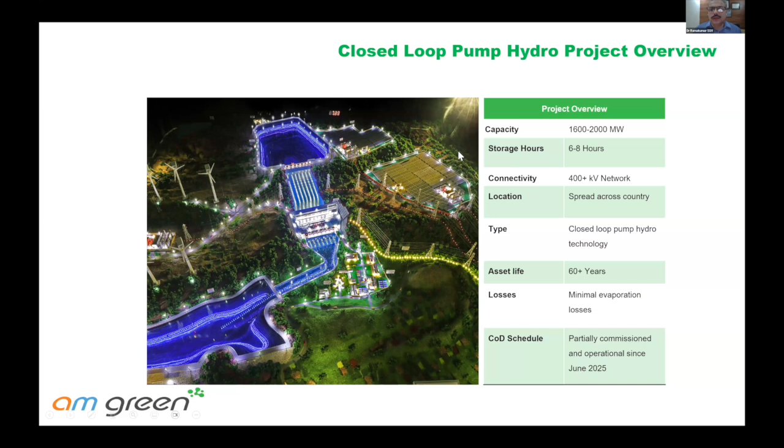So this is that PSP project in the southern part of the country, which has just gone critical. This has two greenfield reservoirs, upper and lower. It's a huge water battery wherein the excess power will be stored by pumping the water from the lower reservoir to the upper reservoir. And in the night time, when the renewable electricity is not there, you release the upper reservoir water back to the lower reservoir. This operation is facilitated by reversible pumps, which act in one direction as a pump and in the other direction as a turbine. They're gigantic turbines supporting that capacity. So that's about my company.

So the theme of today's topic is what Indian players, prospective players, whether government or private players, who seek to set up production units and turn to be SAF producers on a global scale, are looking for. Before I do that in the next 15, 18 odd minutes, let me set the context.

India is going to be ethanol surplus, even after blending 20% of ethanol in gasoline. Our ethanol blending program in gasoline is one of the national success stories, wherein in the last 10 years, from a meager 5 to 7% to 20%, we were able to raise the blending percentage of ethanol, but predominantly the ethanol being produced in the country today is first generation ethanol. So, 2 years back, the Ministry of Petroleum and Natural Gas constituted a committee to recommend which pathways are suitable for India and what kind of blending percentages India should look for come 2027.

This committee was constituted and convened by me as the then Director R&D of Indian Oil, and our recommendation was that the most suitable pathway is alcohol to jet, because alcohol is going to be surplus in India, and we have recommended certain percentages. Since they are not officially mandated, I'm not really giving the numbers to you, but it varies anywhere up to 10% by 2030.

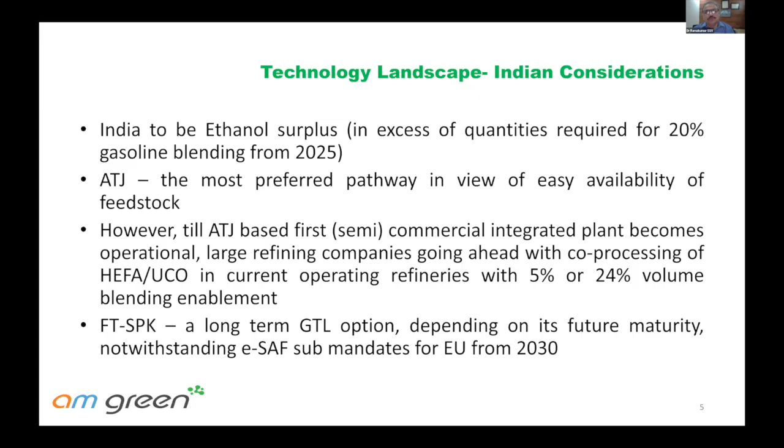Various players, my own company included, are also looking for some of these technologies. I would like to put a disclaimer before I start these slides: whatever global multinational licensors' process licenses of these technologies, I have extensively used the information of these respective licensors, which is openly available in the public domain. So that is the disclaimer.

So the first generic pathway is sugars to ethanol and ethanol to SAF. Whatever sugars you have, for the time being forget the biomass part. But in whatever way you get the sugars, after fermentation you get the ethanol, and ethanol can be a monolithic production at one large plant, or there are a lot of sugar distilleries in the country, so it can be in a decentralized form.

The ethanol can be produced and then subjected to a two-step process of ethanol dehydration, followed by oligomerization of the resultant ethylene. So it is dehydration, oligomerization, followed by hydrogenation and fractionation. That is the generic pathway.

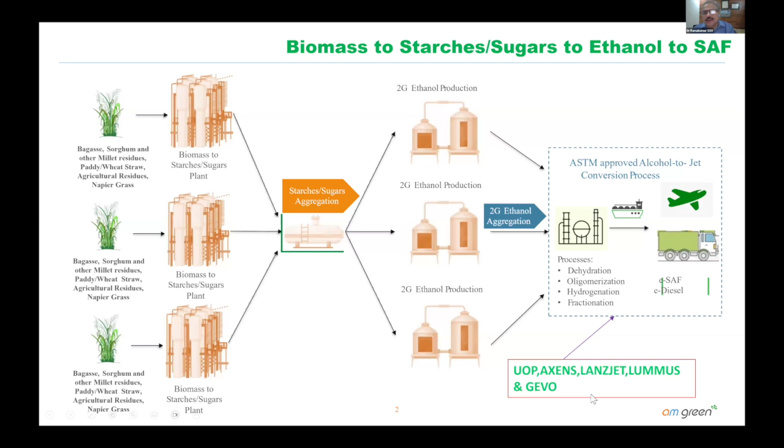And these many players are there: UOP, Axens, LanzaJet, Lummus, and Gevo. I'll discuss a few of them, the salient features of some of these players.

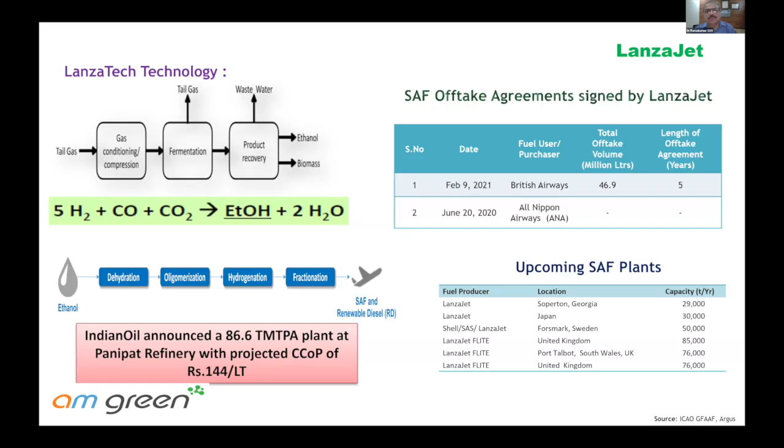LanzaTech is one of the front runners pursuing ATJ. Their technology and pathway is ASTM approved, and they have announced quite a number of projects on ATJ throughout the world, including in India. In India, one of the largest government oil companies, Indian Oil Corporation, has already announced an 86.6 thousand metric ton per annum plant based on this particular technology. And my own company, AM Green, has already developed a detailed feasibility report based on this technology.

So if you see the overall carbon intensity of these pathways, we have done a scenario study, and depending on what kind of power and what kind of hydrogen we are using, and what is the source of alcohol used as feedstock, the carbon intensity can be as low as 16.29 grams CO2 equivalent per megajoule of ATJ-SPK. So a whopping 82% emission reduction potential can be obtained if we use renewable energy and green hydrogen for this.

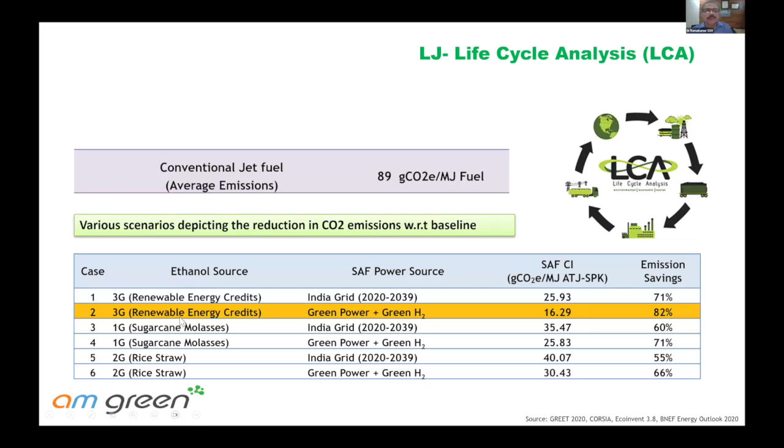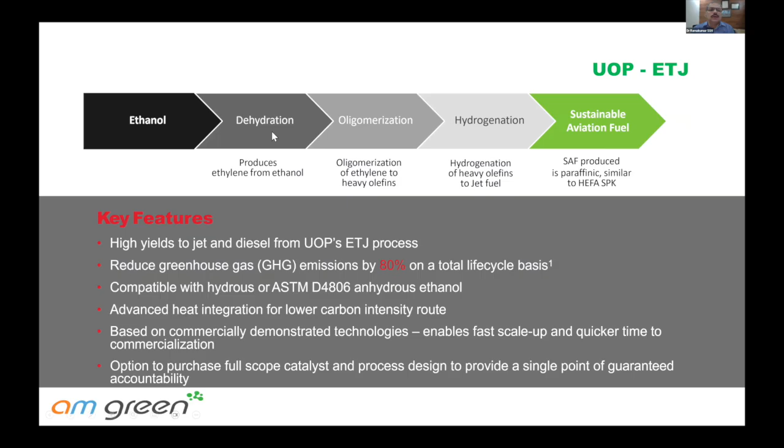So there is another potential technology pathway, UOP. UOP also has an ETJ technology: ethanol dehydration, oligomerization, and the generic route.

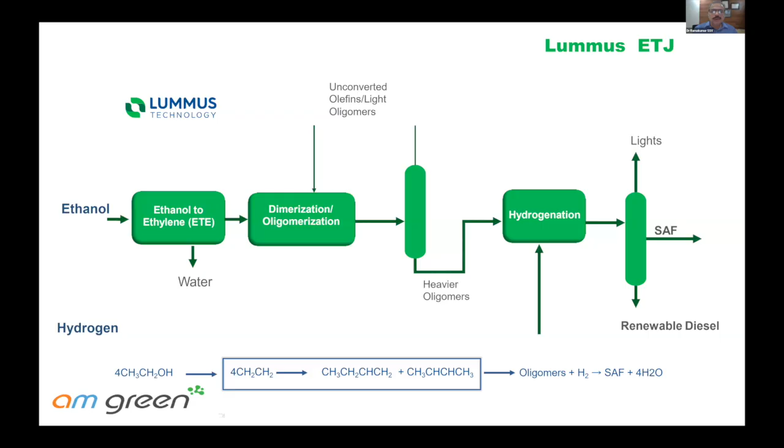Likewise, Lummus is another dominant global licensor who has also announced that they are ready with the ETJ part. Their claim is that they don't have an integrated SAF plant, but they have a very well proven ethanol to ethylene dehydration technology.

They have 10 years of commercial operating experience, and at least a couple of units are operating continuously for the last 10 years.

Likewise, their pathway goes from ethylene. After the production of ethylene, it can go first to dimerization, and from dimerization to oligomerization, followed by the conventional steps of hydrogenation. Lummus also claims they have 37 years of experience in oligomerization, converting lower olefins into higher olefins and SAF-like C8 kind of products.

So their claim is that the individual sub-processes of ATJ are more than amply commercially proven, and just process integration is a regular job for Lummus. That's their claim.

And they have not spelled out what their carbon intensity is going to be, but I think they can also go for a lower carbon intensity of the resultant SAF, provided green hydrogen and renewable energy are used.

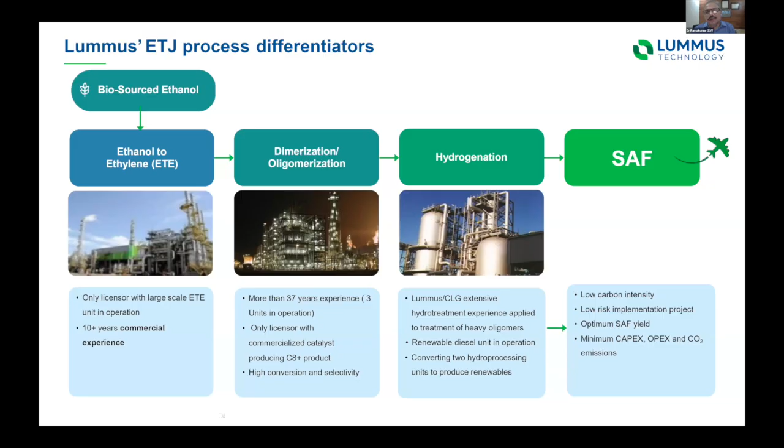The second pathway - up till now I talked about ethanol to jet. Now there is methanol to jet, and methanol is a more fungible product, and it can be produced from several pathways. One of the most promising pathways of producing methanol is using biogenic CO2.

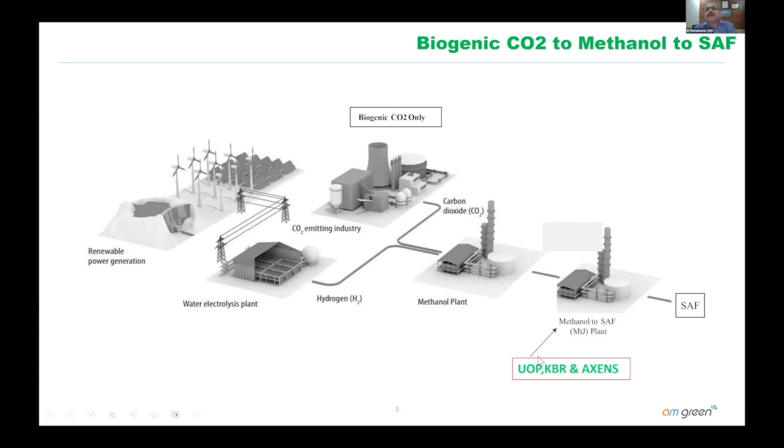A lot of biomethanation plants producing compressed biogas from agri residues emit CO2, and this biogenic CO2, when utilized and upgraded to higher products, may lead to a negative footprint for that particular part. So UOP, KBR, and Axens - all three of these global licensors - have technologies to upgrade green methanol into SAF.

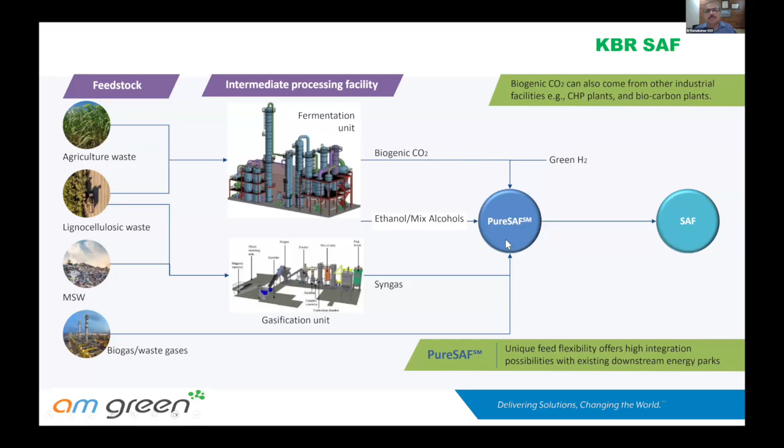That is their claim. KBR also says that besides agri biomasses, they can also include a lot of waste material like municipal solid waste and biogas. Through gasification, they can produce the syngas, and from syngas, their trademark technology is PureSAF, and from there they can produce the SAF.

The third generic pathway for producing SAF, as India is looking at, is the co-processing route, where you can use used cooking oil or vegetable oil. You can degum it, demetal it, and bleach it, and then subject it to the existing hydroprocessing units of the operating refineries. This is the fastest way of producing SAF without incurring any extra capex, and you can enter the market. But the limitation is that you can blend only 5 to 20% as per the ASTM stipulation.

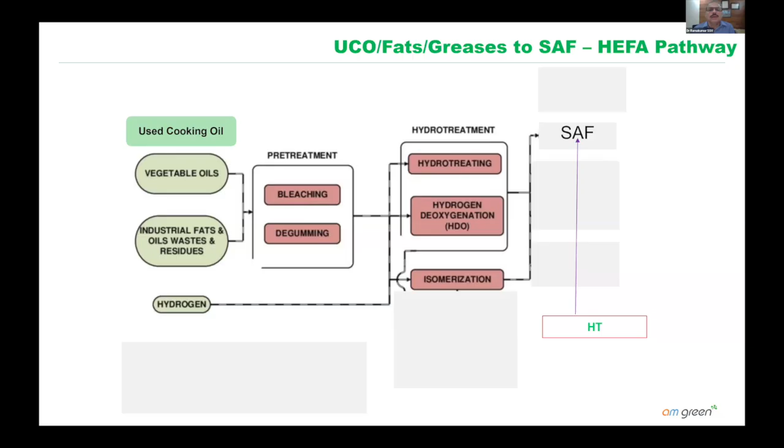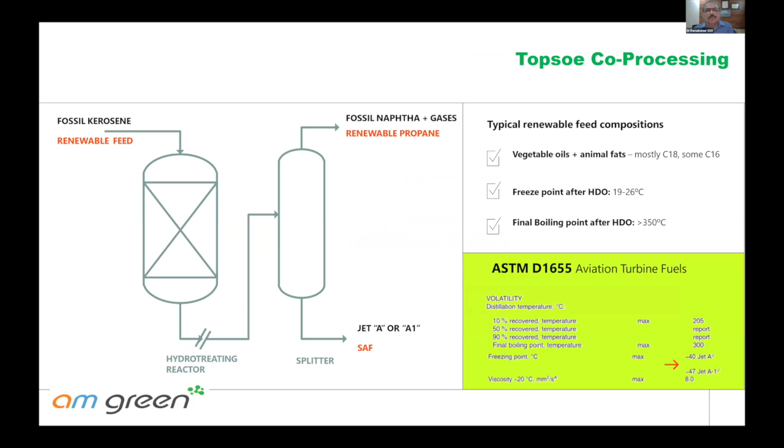But in India, even 5% blending from 2027 to 2030 is really going to take care of the Indian aviation emission footprint. So co-processing is a very, very potential pathway of producing SAF in India. And Haldor Topsoe also has very potential catalysts for enabling this co-processing pathway production of SAF through these kinds of feedstocks.

I want to specifically talk about one Indian indigenously developed technology. This is by a national institute called Indian Institute of Petroleum, a CSIR institute, and they have developed a single pot process using HEFA or HEFA kind of feedstocks. It is only a one shot process wherein all the chemical steps of deoxygenation, isomerization, selective cracking, all these things happen with one proprietary catalyst in one single reactor, and they get biojet fuel with C9 to C15 and diesel range.

And they claim that one of the USPs of this technology pathway is that it is highly aromatic-rich SAF, so that you don't need to add additional aromatics to meet the ASTM specifications, which is mandatory in low aromatic or non-aromatic SAFs that other ATJ pathways produce.

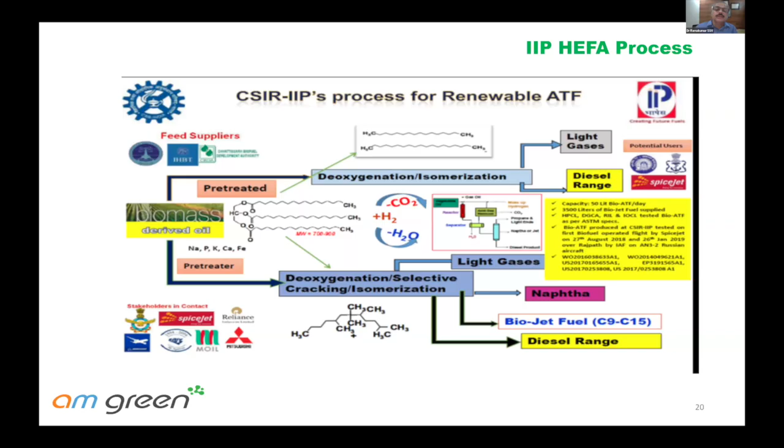One of the last slides that I would like to take is a very, very interesting technology pathway. This is a US startup owned by an Indian scientist, the startup company called Visolis. By the way, the IIP pathway is in an advanced stage of ASTM approval, whereas Visolis technology has just embarked upon ASTM approval.

In this technology, they have biofermentation as the first step, using various sugars or sugar-based starches, and the intermediary product that they produce by the curated microorganism, the so-called yeast, is MVL. They have a patented intermediate called mevalonolactone, that is MVL.

And from this MVL, through catalytic upgradation, they can produce highly aromatic-rich SAF. In fact, they can produce 100% aromatic SAF, or they can control the degree of aromatization in their final product, as per their claim.

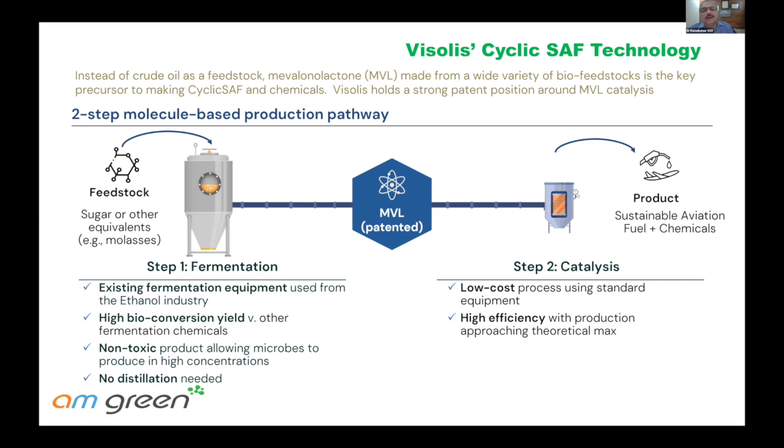So this seems to be interesting and different from the rest of the pathways, but how this would be scaled up and how fast they can get the ASTM approval, that is a moot point. As far as India is concerned, many producers, both government companies and private sector, are looking at all sorts of technologies from global technology players. I have not included all the technologies for paucity of time, but I have just introduced you to the pathways which are potentially likely for adoption by one or the other player in the country.

So to sum up my presentation, Indian SAF technology landscape: all leading ATJ and co-processing pathways are in the reckoning. In the short term, much the same way as global trends, initially we might go for a co-processing process of HEFA, but I think in the long run, in the medium term also, by 2030, we will resort to ATJ as one of our major production pathways.

Methanol to jet is also coming to the fore. Ethanol to jet is a front runner, as I told you. Major refiners are actually going for co-processing.

FTSPK, we feel that unless the gasification step is properly matured and scaled up, is going to be a little far away option. Indian Institute of Petroleum's indigenous single pot technology to convert HEFA into aromatic-rich SAF, and another interesting technology, are also on the radar.